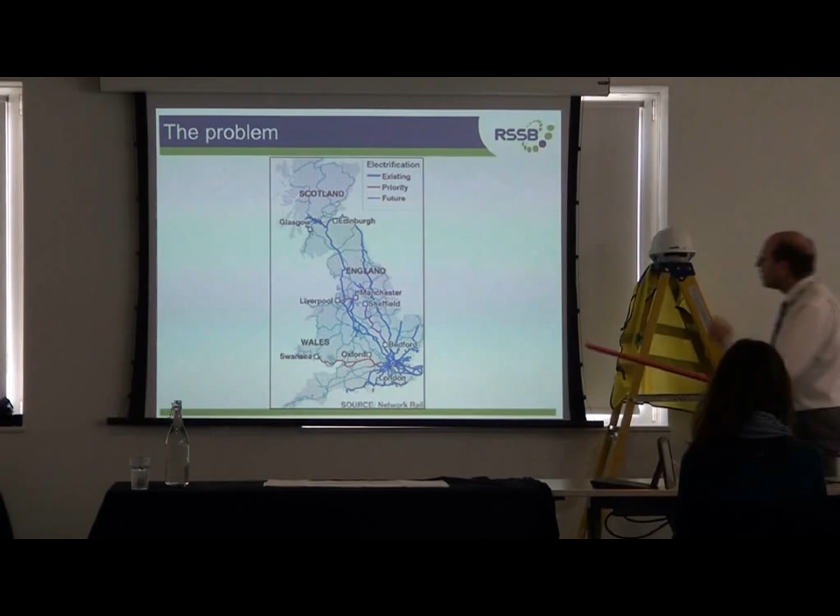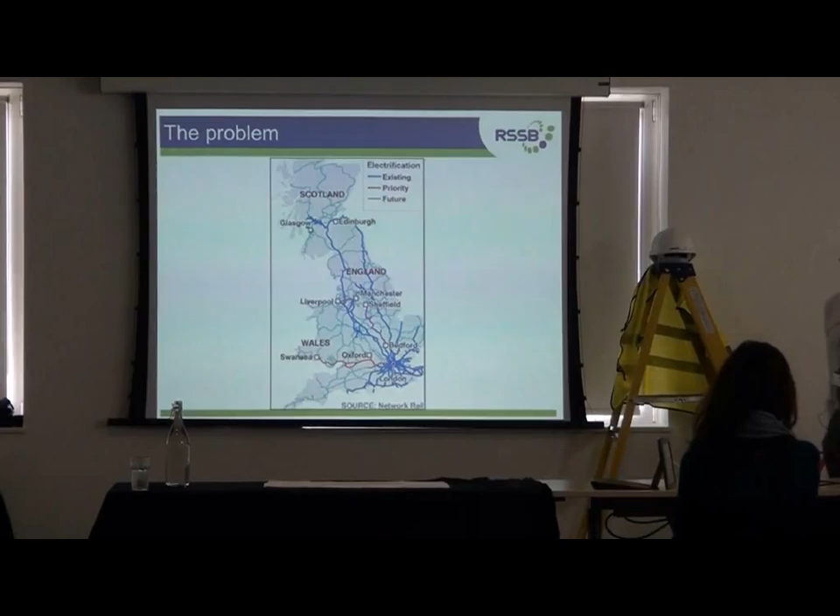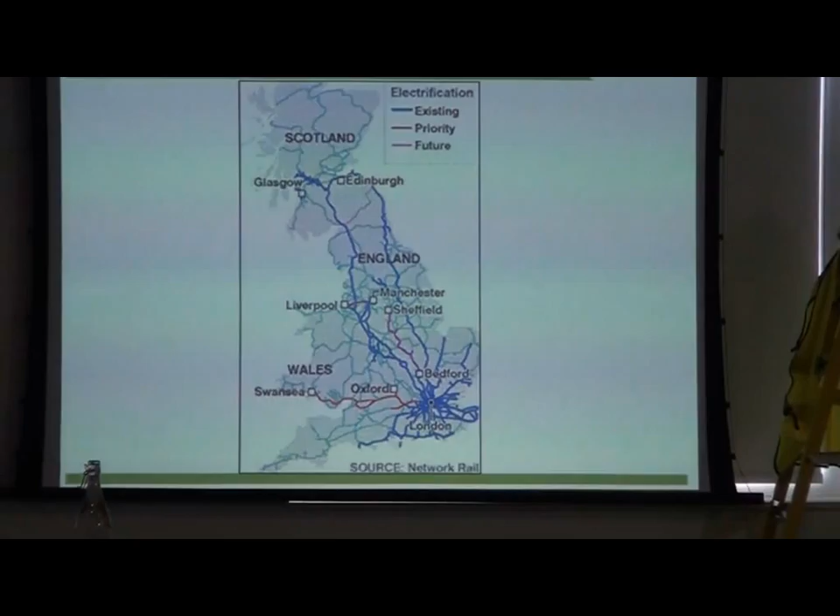This map is a map of Great Britain, and we've got the current electrified lines marked up in blue, and a few proposed lines as well. But that represents only about 40% of the network. Even with the plans announced, there'll still only be around 50%. So there are vast parts of the nation with no electrification whatsoever.

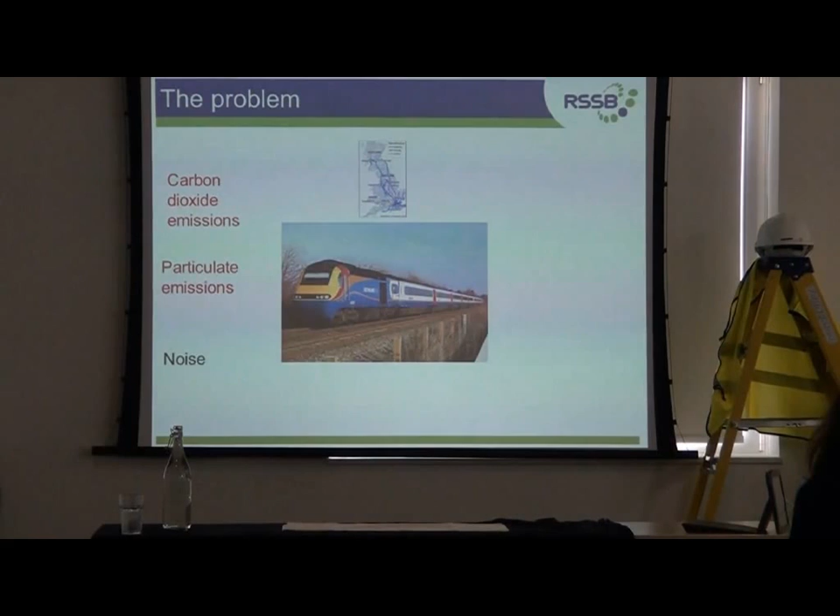The current alternative is diesel, and there are a number of problems associated with diesels. Carbon dioxide emissions contribute to global warming and climate change. Particulate emissions lead to lung cancer, and there's noise pollution. There are only finite fuel reserves, and there's security of supply - if you look at the areas where oil is available, they often correlate with sources of conflict.

So a long-term alternative to diesel is needed.

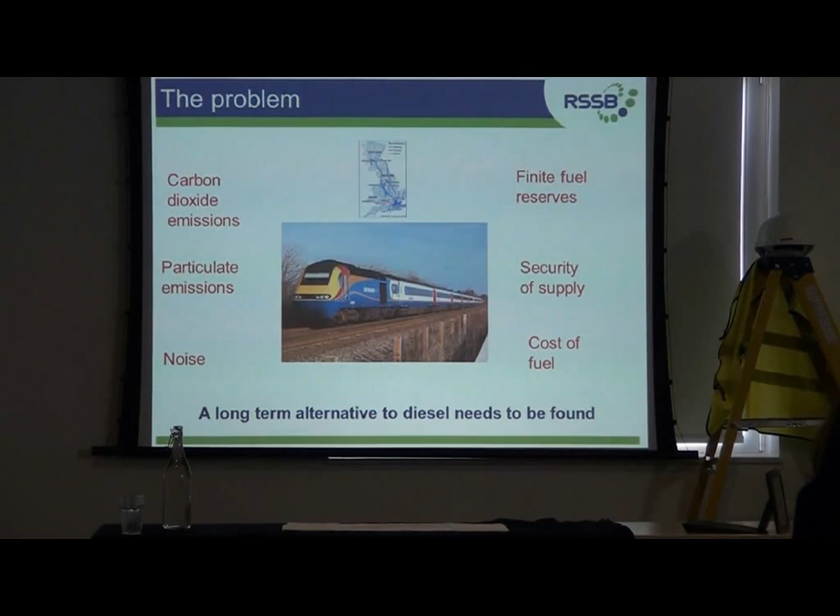One solution is, of course, further electrification, but that isn't the solution I'm looking at today. I'm looking at a solution which is the magic of hydrogen. We should look at the possibilities this element can provide as an alternative to diesel. In case you don't know me, my name's Jeff Allen, and I would like to spend the next 40 minutes entertaining you, and I might just enlighten you as well with the magic of hydrogen.

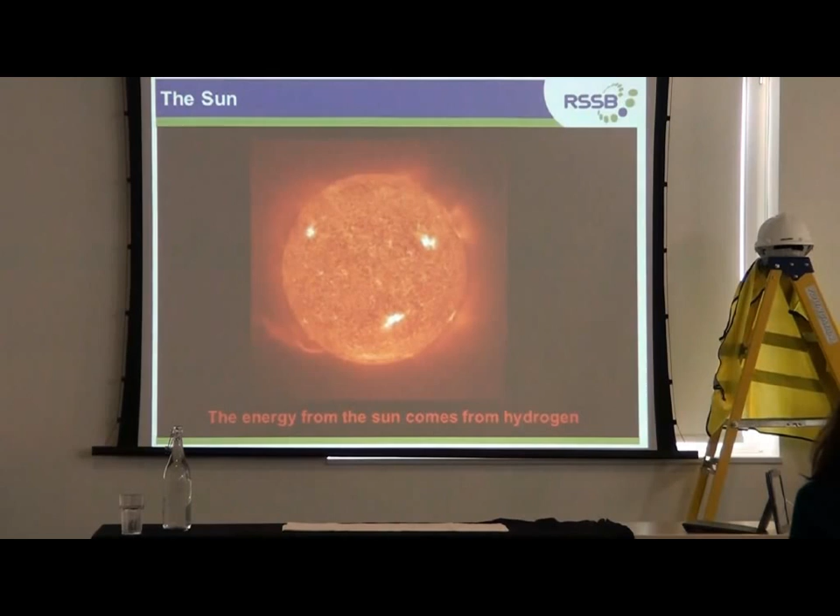If we go a bit closer - the Sun, our nearest star. Again, the most abundant element in our own star is hydrogen, which generates the heat and light which we enjoy, particularly on a summer's day. So the key message there is that the energy from the sun comes from hydrogen.

Getting even closer - planet Earth, our own planet. Now, planet Earth is a notable exception. The most abundant element on Earth is not hydrogen. Does anyone know what the most abundant element on Earth is? No - I'll tell you, it's oxygen. Fortunately for us. So oxygen is the most abundant element on Earth.

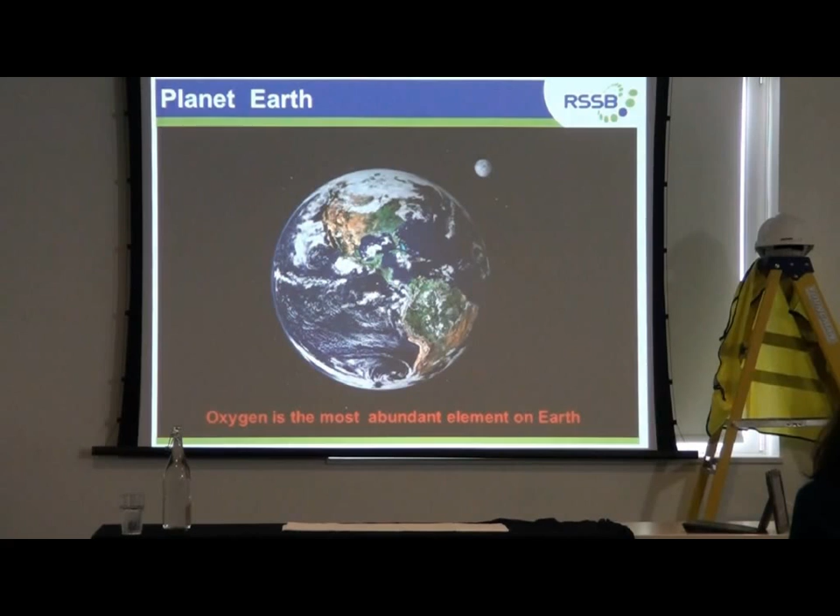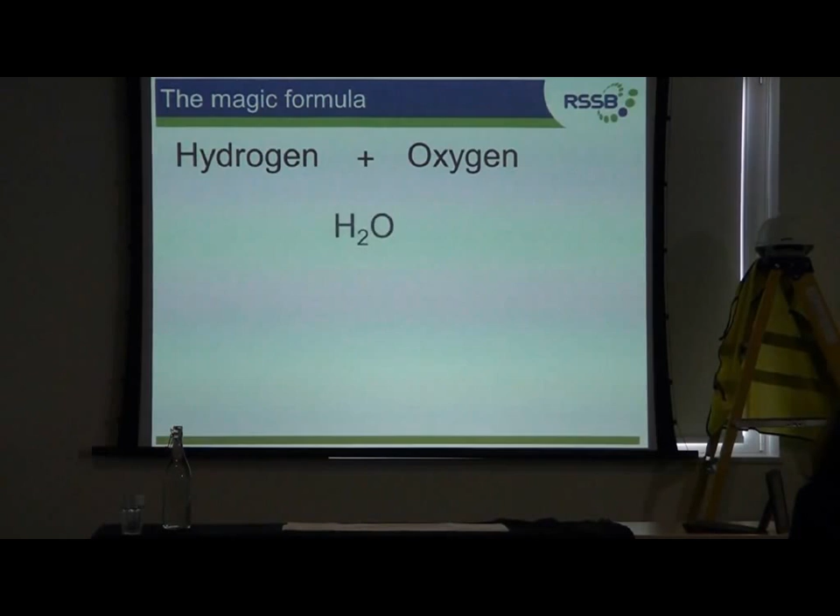Now, what I want to cover next is key to the whole presentation - it's the magic formula. And the magic formula goes something like this: we add hydrogen to oxygen, and it won't come as a surprise to many of you, particularly the chemists here, but what you get is H2O, which is water. What we often don't appreciate is we also get energy. So by combining hydrogen with oxygen, we can produce energy.

Now, when I came in this morning, I thought it was a good idea to have a look in the Financial Times, so I bought a copy. Mustn't spill anymore. I don't know if anybody else has looked in the Financial Times today, but there's quite an interesting article talking about climate change, about an Arctic voyage opening up to allow ships through the Arctic - obviously a shortcut. It's quite an interesting article, but I wasn't sure really how watertight the argument was, so I thought I'd test it out. Yeah, seems pretty watertight to me. Still watertight. Oh well, there's your magic. Thank you.

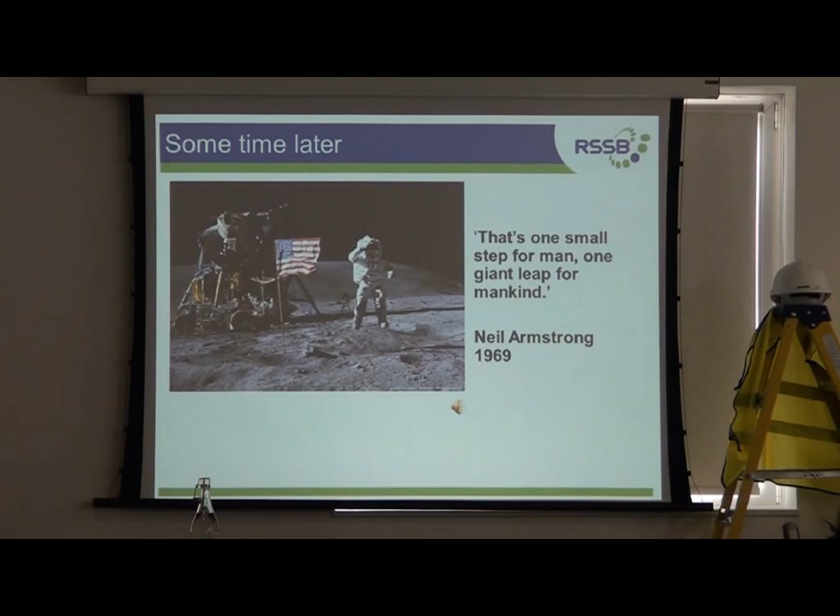Now some of you will be aware that there were a number of engineering challenges to achieving that. And this was one of the first ones.

Now I've primed Jeff for this, wherever he is, at the back there. Jeff, I'm not going to ask you for the model number. We're going to say this is a 1906A, and you're going to tell everybody who made that. It was made by a company called ICL, who was the British computer industry at the time. White hot heat technology - these days it probably has about as much power as your average watch, I think. But in those days it was absolutely the leading edge of technology, and as you can see, it's quite large, occupying more or less a house.

This was actually the single computer that we had at the University of Birmingham when I started as an undergraduate. And one of the first jobs the mission had to achieve was reducing that in size, which they did. This is the navigation computer, which is not much bigger than a modern desktop.

But that wasn't actually the most significant problem that they had to deal with. The much bigger problem was working out how to power the craft up in space for 3 days and support 3 astronauts. So what they did was they looked at the technology available.

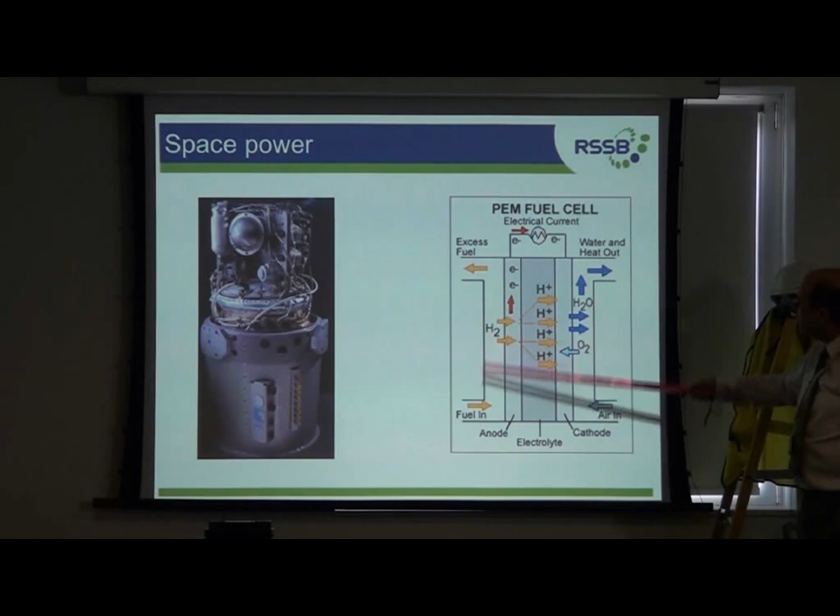It's a fairly straightforward device. It's got a couple of electrodes, and basically you pump hydrogen in at one side, oxygen in at the other, and you've got your power and your water coming out. These devices have been used ever since the Apollo mission, all the way through the shuttles. The Russians use it, the Chinese use it, and so forth, for all their missions.

Now what I've got is an experimental one here, a little one. This is the fuel cell here - basically looks like that. I'm going to pass this around, you can have a look. Please don't dismantle it, I've got to use it a little bit later on in the presentation.

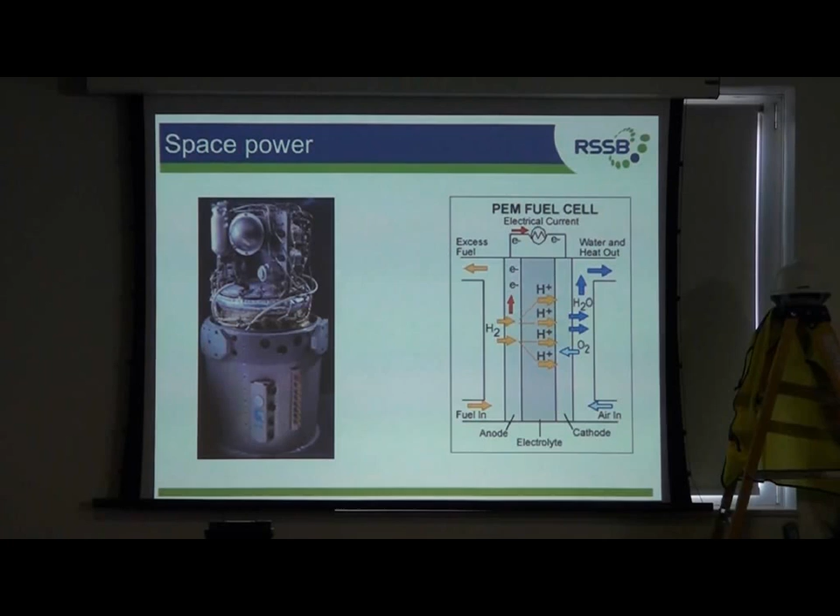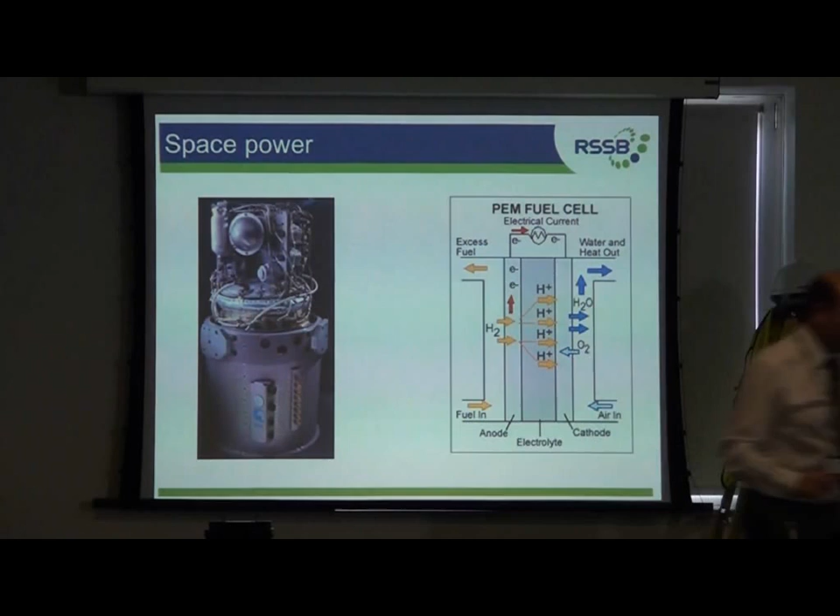Now, a couple of years ago, I would have struggled to demonstrate one of these devices - commercially available ones anyway. But within the last 2 years, these units have been coming out. So this is a mini pack, a hydrogen fuel cell. That's the fuel cell there. And I've got 10 litres of hydrogen here.

I'm going to plug in. Now you'll see the little red light flashing. We've just got to wait a short while until that red light turns to blue, so you can keep an eye on that. Won't be long, I hope. There we go - right, that's all ready now.

So if I put this on, there we go, a hydrogen-powered torch. Now, I've just thought of a brilliant idea - just happen to have one of these handy.

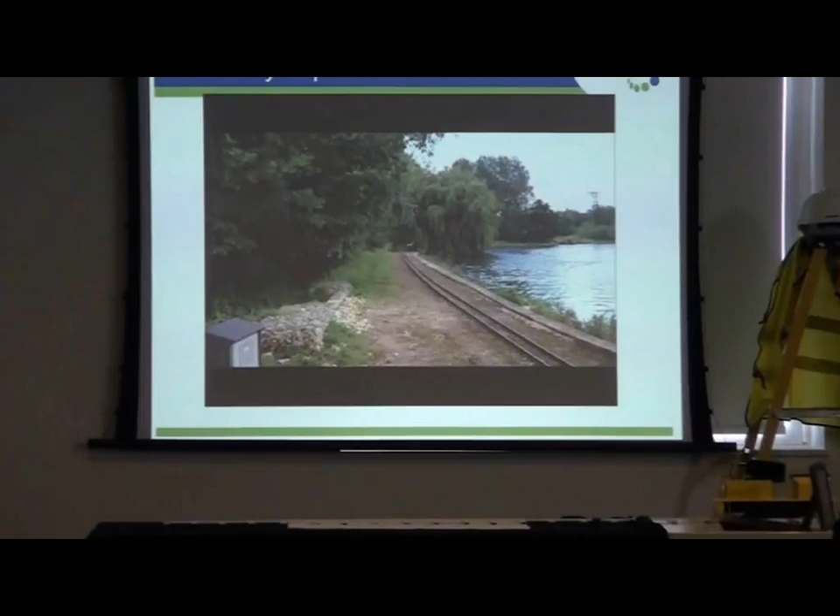Well, this is the University of Birmingham. This was filmed earlier this year, and it is the UK's first hydrogen-powered locomotive. It even makes the right sounds.

Now that's 4 tons of load on that it's hauling. That's about 100 times more powerful than this device, but still not very powerful. It would hardly even power a kettle. You'd wait an awfully long time for your tea with that.

So, what about the real world? What about going beyond the experimental stage?

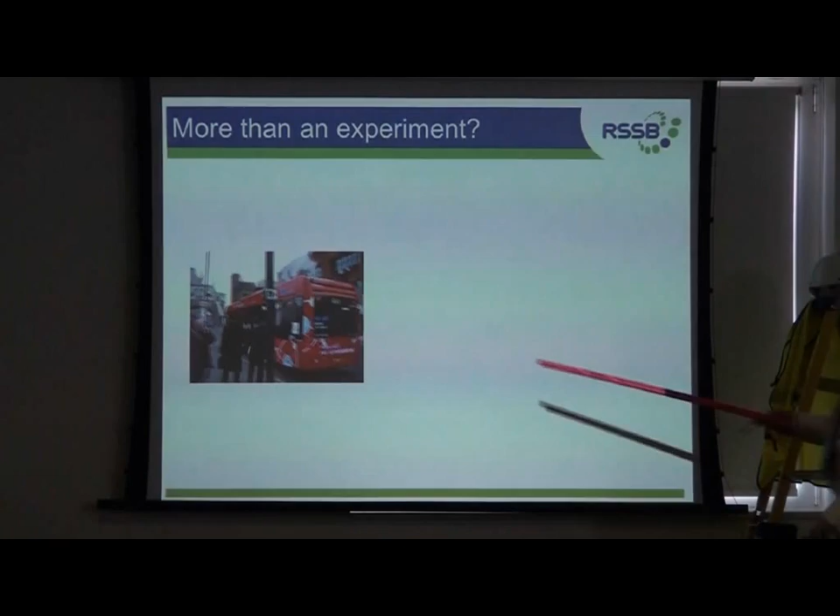Well, this was a video that I recorded in 2007, and it was a trial of a hydrogen-powered bus running on the RV1 route, which runs along the Strand, across Waterloo Bridge, across the river, and then, as you can see here, goes back up Tower Bridge.

That trial has now ceased, and we now have the second generation hydrogen buses. So this second generation set of buses are running on the RV1 route now.

And in addition, below that you can see the taxis, or a taxi, which is also hydrogen powered, and that taxi was developed in time for the Olympics, and is actually powered by a hydrogen fuel cell that's made in the Midlands, in Loughborough, by a company called Intelligent Energy.

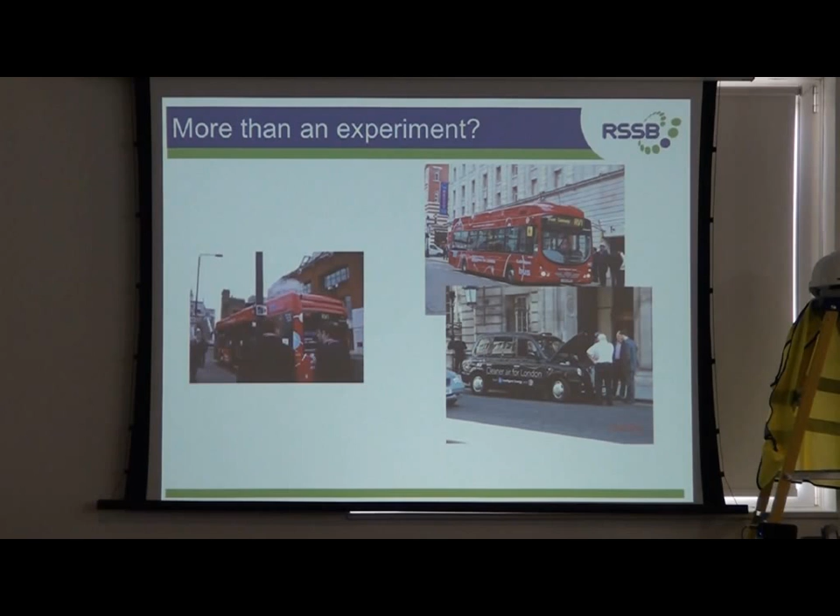So really you can see that hydrogen is being used for transport today.

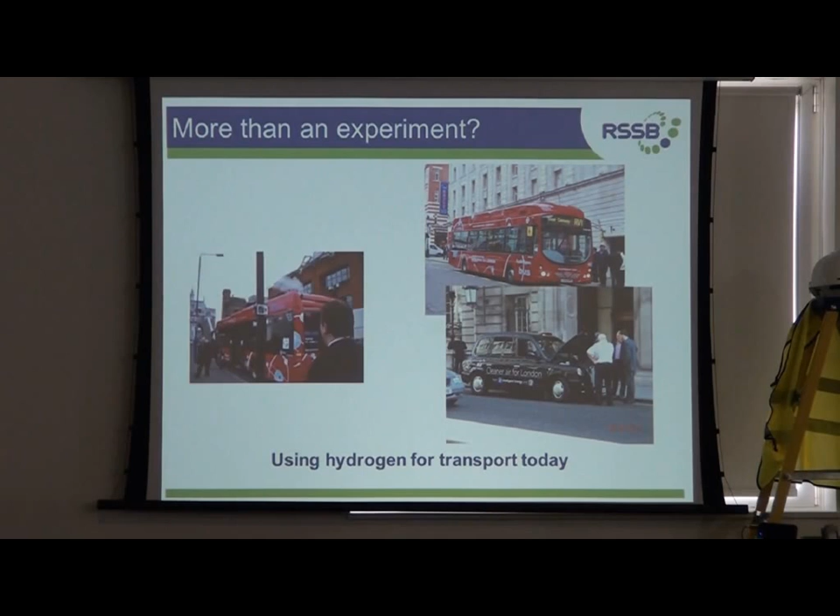Now, a lot of railway people will explain that it's all very well running buses and all this sort of thing, but the environment's very harsh on a railway and it doesn't always work on a railway.

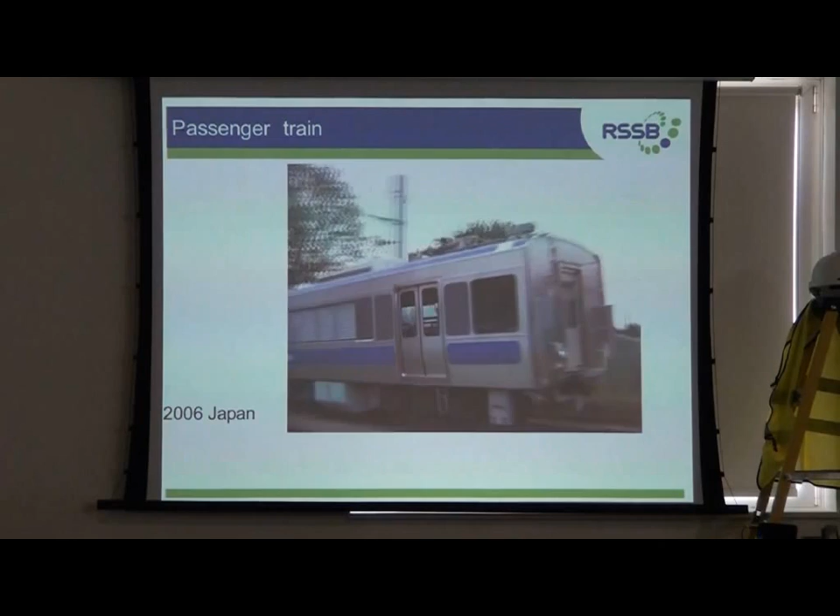So, if we now have a look at this. This is 2006 in Japan, and this is the experimental one that was run by Japanese Railways as an experiment.

And if you don't think that's big enough, what about this one?

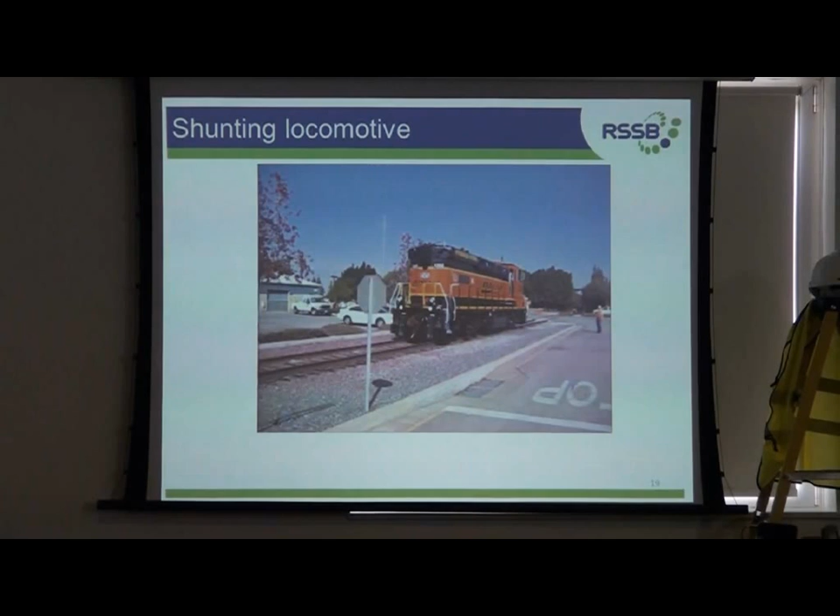Now, the great thing about hydrogen locomotives is they're very quiet, which is why they have to have an awfully loud bell on them. This one is a very powerful locomotive.

It's a shunting locomotive. It's a 1 megawatt locomotive, and not only was that proved in terms of trials of shunting wagons around, it was also used as a power supply to supply a complete army base. So there's lighting, heating, cooking, air conditioning, and the US Army were particularly interested in this development and sponsored some of that work.

Okay, so as you can see, it's a little bit more than just a fanciful idea. It's something that seems to work. And what I want to do now in the remaining time is progress on to look at two elements of hydrogen. One is manufacture of hydrogen and production of hydrogen, and the second thing is storage.

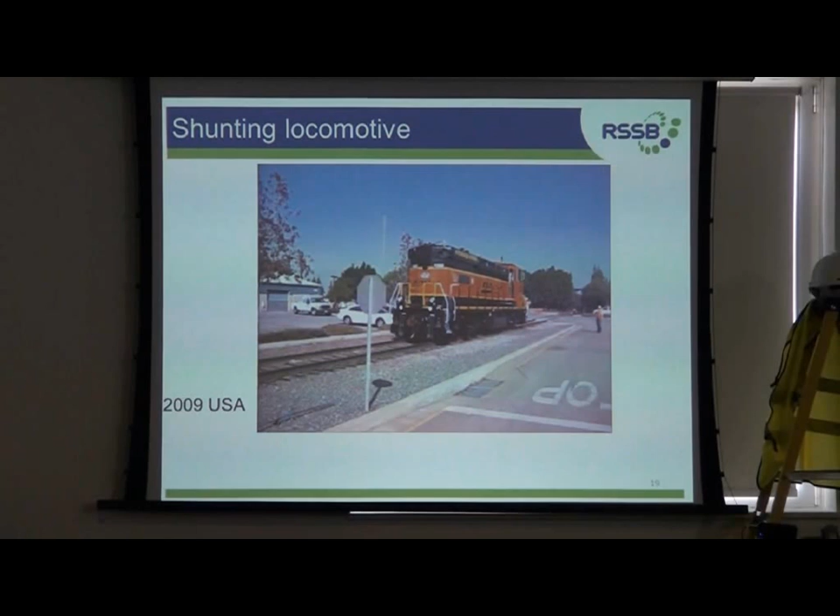So let's have a look at manufacture.

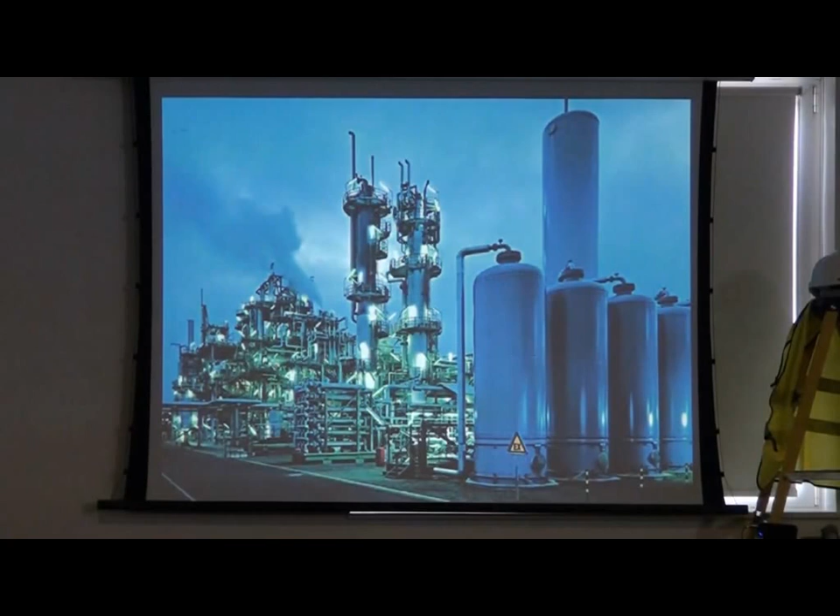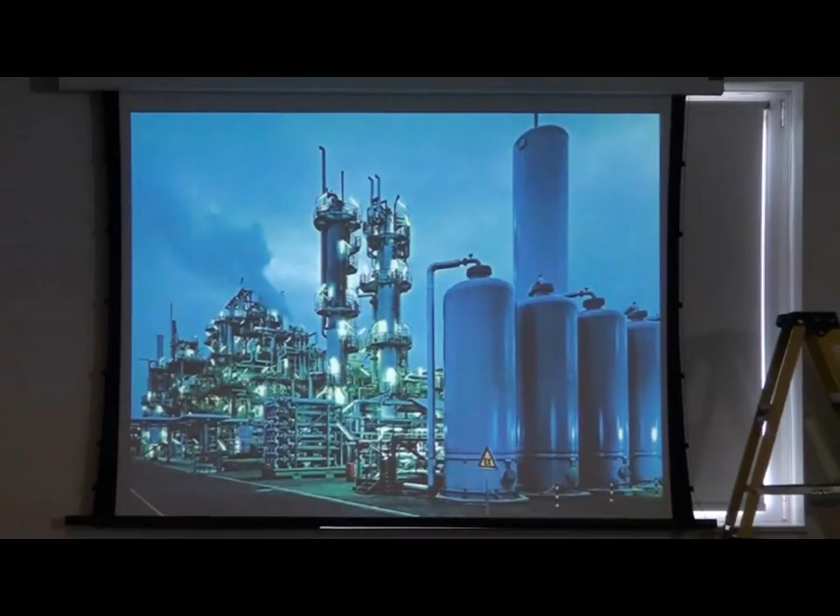Well, what I need is a chemical plant like this, and obviously I can't bring that into the presentation. So you just have to pretend.

No. There are other ways of doing it, so we'll have a go at one of those. Who left this line there?

Now, all you need is some water, a bit of plastic container, a few LEDs, a couple of AA batteries, got some of those over here, a syringe.

Yeah, so hurry up now.

Okay, so we'll put the... can you all see that? Whoops. Bit too much water in there.

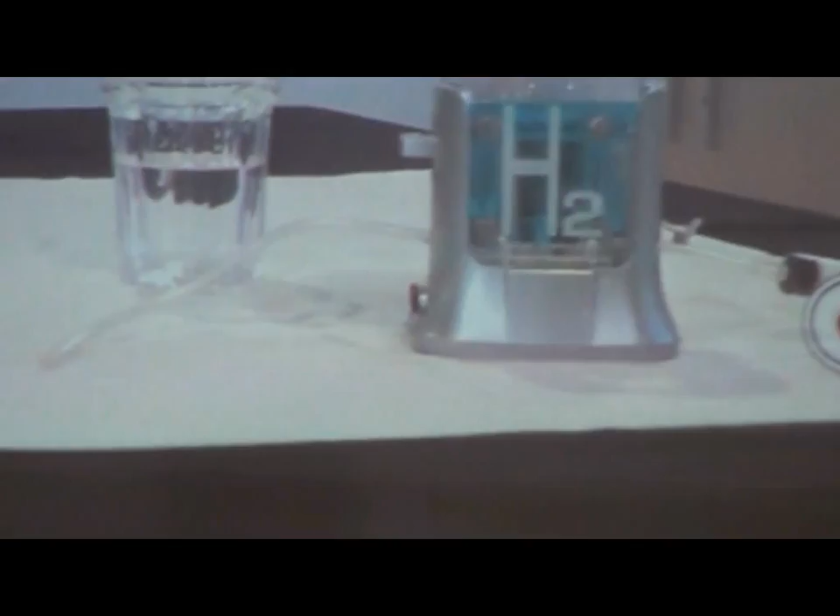Has somebody got the... thank you.

Now, I just need one of these. I just happen to have down there.

Right, there's absolutely nothing there at the moment. So what I'm going to do is just connect this supply of hydrogen.

Well, there it goes. There we are. So we're getting that hydrogen produced. It's going into the fuel cell, and the fuel cell is now generating a small voltage.

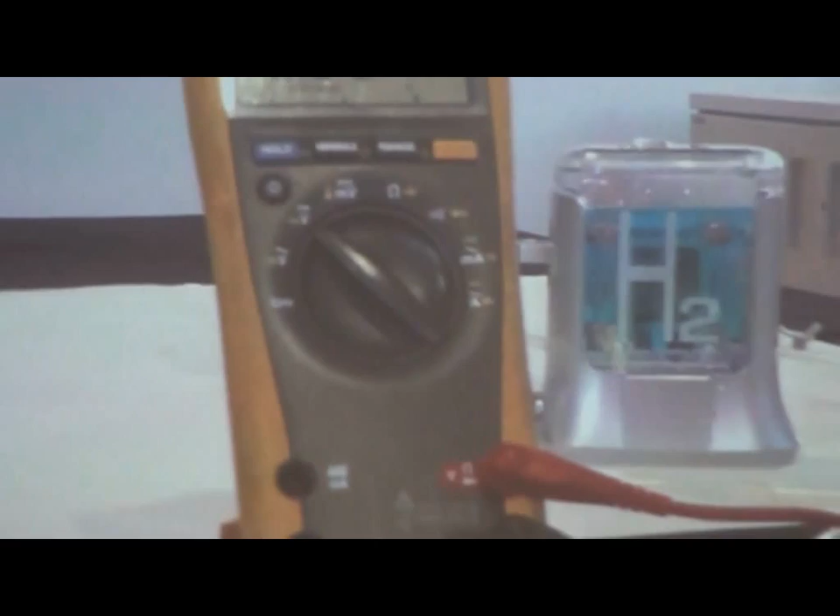We'll give it a little bit longer, get some time to get going. Actually, I could make it a lot easier by pulling this out.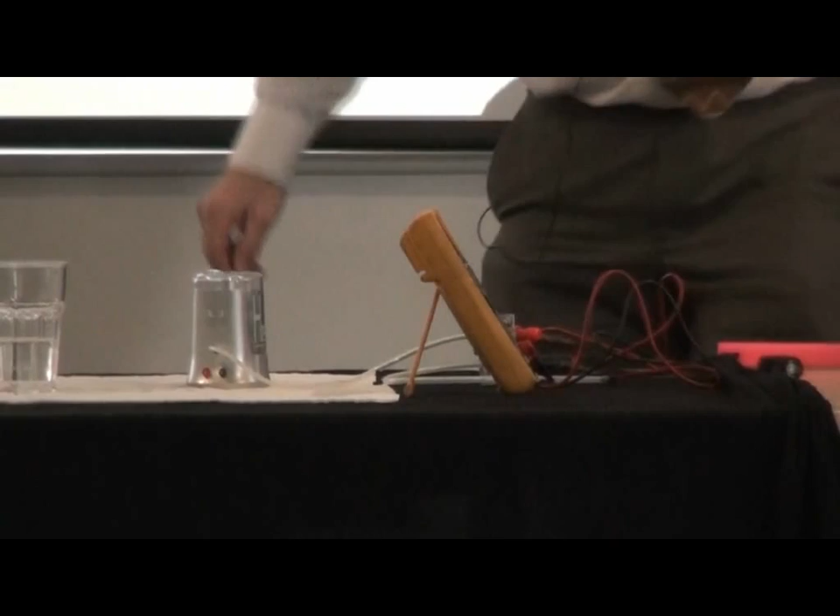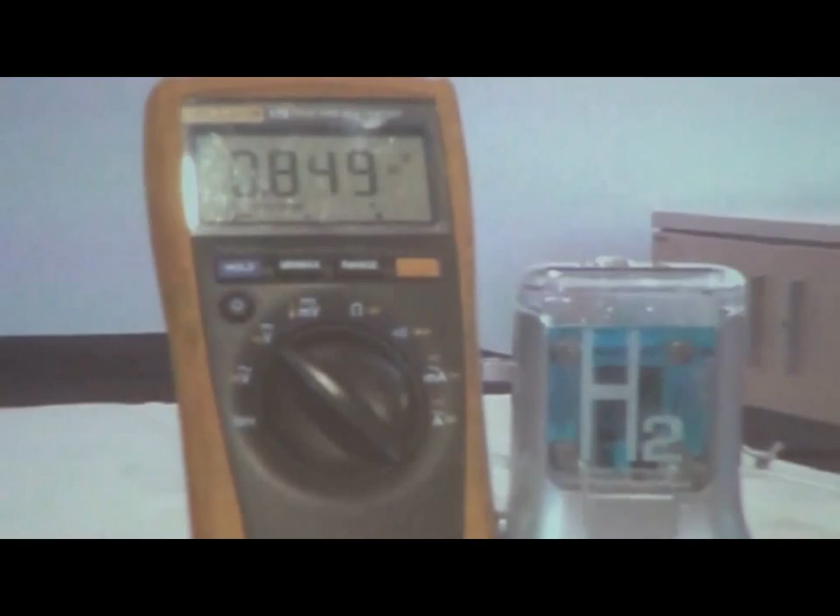There we are, nearly a volt. And if you string these all together, you can get the sort of thing to power a locomotive if you make it big enough. So, that's a means of producing hydrogen from water using electricity and then feeding it into that fuel cell to make the fuel cell work.

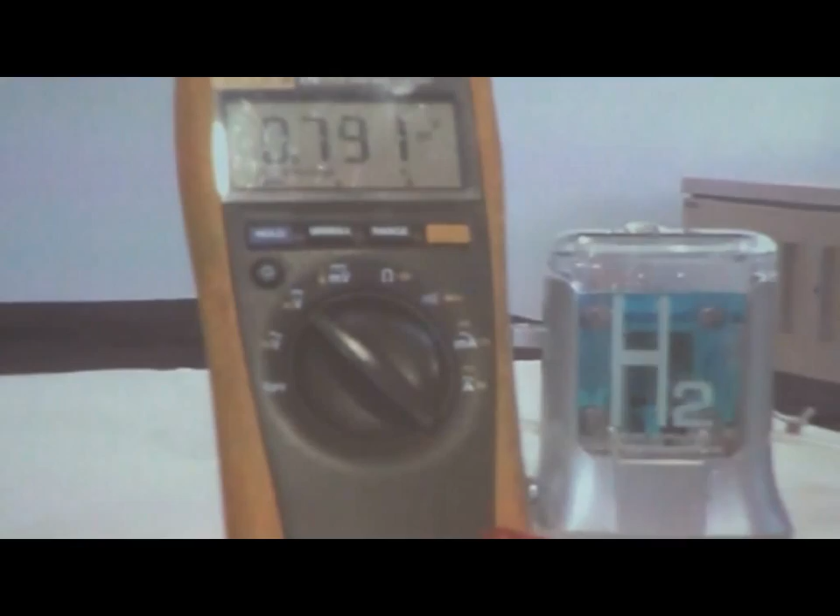Can I advise anyone who's thinking of presenting to the whole of RSSB and doing live demonstrations? Probably not a good idea.

Well, there are a large number of ways of producing hydrogen. The way it's often used these days is from natural gas, but there are more sustainable ways of doing it, although even from natural gas you can get some advantages. This was a slide I produced 5 years ago when I last presented on this subject, and this part hasn't changed very much.

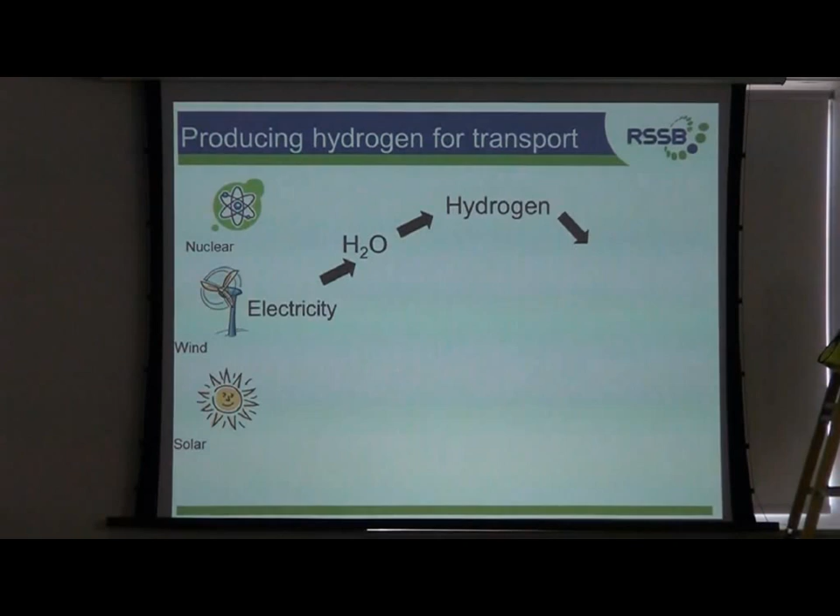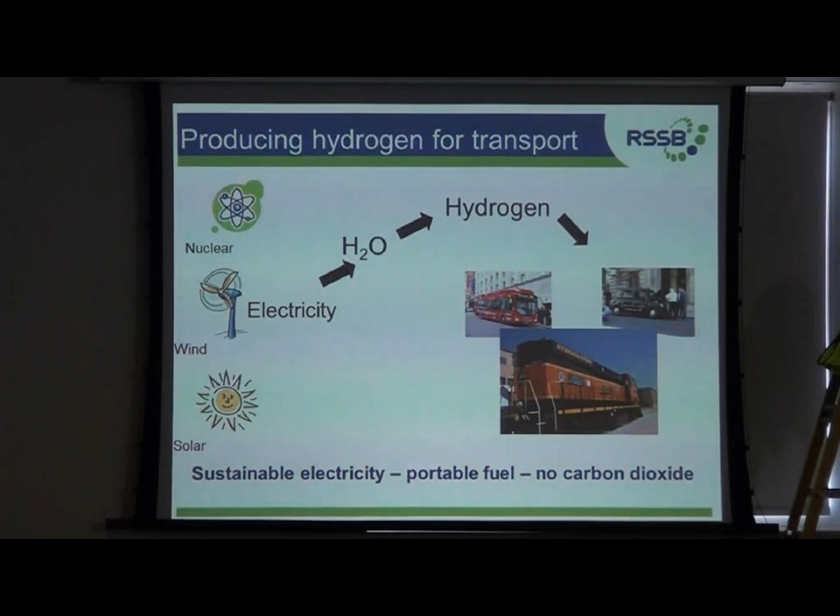Electricity applied to water gives hydrogen, as we've seen, and then you can apply it to any of these more modern forms of transport. I had 3 examples in the last presentation, and each has been replaced with a more up-to-date version, so things are progressing here. Sustainable electricity is able to produce a portable fuel, and if you use sustainable electricity, you get no carbon dioxide, no noise, no particulates, etc.

Now, what I want to move on to next is looking at how we store hydrogen, because having produced it, you can't always use it directly as we have here. One of the most popular ways in which hydrogen is stored is by compressing the gas.

There's quite a bit of nonsense talked about storage of hydrogen using compressed gas. One of the myths that goes around is that you put a lot of energy into compressing the gas. Well, to give you some idea, it's about 5%. So the energy that's in that gas, if you want to compress it to a reasonable extent to go into something like that, you use an additional 5%.

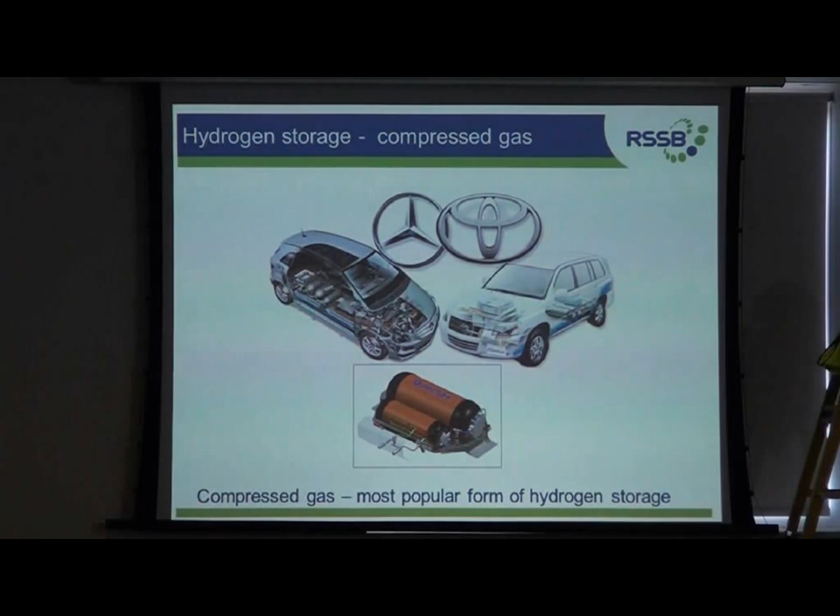There is a way of getting a longer range that I want to talk about next. So this is the most popular form of hydrogen storage. But what I want to talk about next is liquid hydrogen. But I want to give a little bit of background on that.

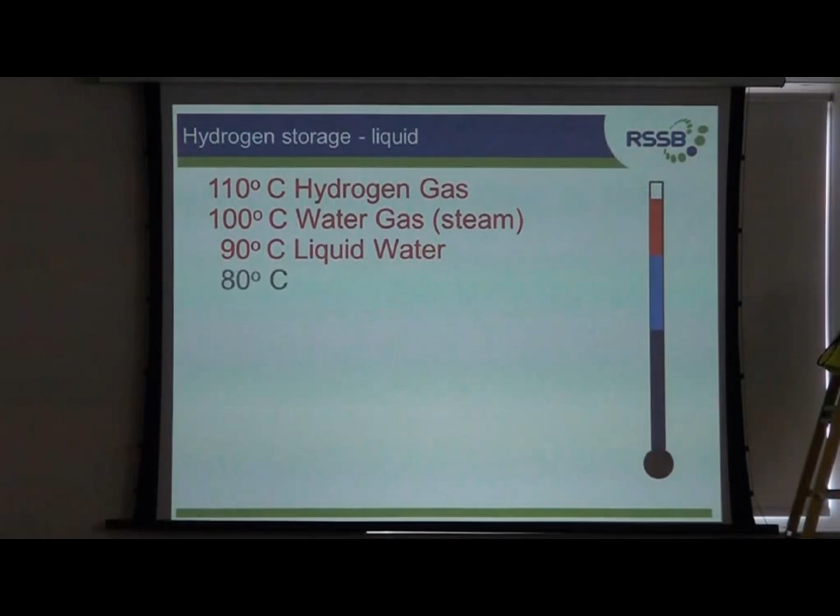Because if we think about temperature and start at 110 degrees centigrade, so this is 10 degrees higher than the temperature that water turns into steam, it's in gas form - we have hydrogen gas at 110 degrees. If we go down 10 degrees, we've got water in the form of gas, i.e. steam. If we go down a further 10 degrees, we've got liquid water. And if we go even further down, to 0 degrees, so we're now at ice temperature, it's still a gas even below that, at minus 10 degrees.

So let's keep going. At minus 80, it is still a gas. Just to give you some idea, minus 89 degrees is the coldest recorded temperature in Antarctica. Right, we'll go down a lot quicker now and a lot further. At minus 240, we still have hydrogen as a gas.

We actually have to get down to minus 253 degrees centigrade to get to liquid hydrogen. And to give you some idea, the very coldest temperature you can get to is minus 273 - it's not physically possible to get below approximately minus 273. So that's how close liquid hydrogen temperature is to absolute zero. So to put it in simplistic terms, liquid hydrogen is very, very, very cold.

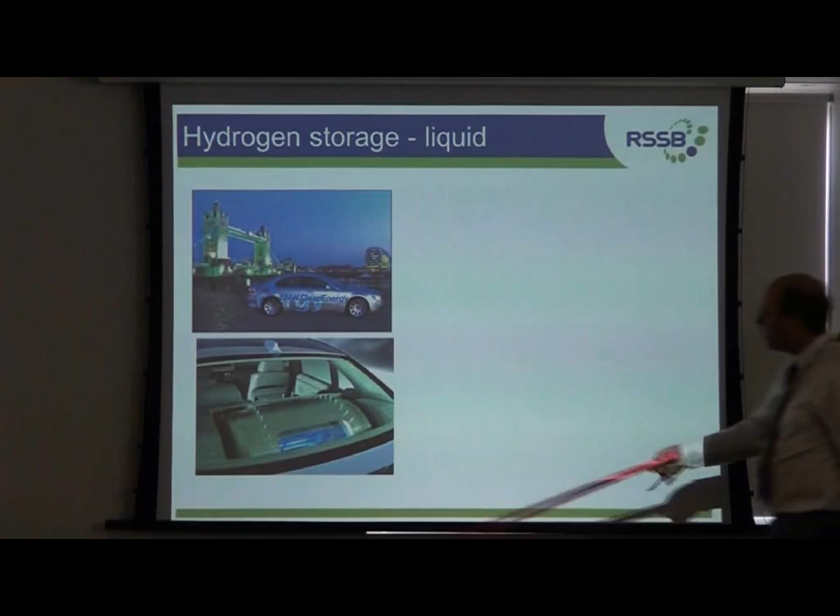This is the tank in the back, partly in the boot and partly on the rear shelf. You can see what it's like in the boot. And this is like a super thermos flask for liquid hydrogen.

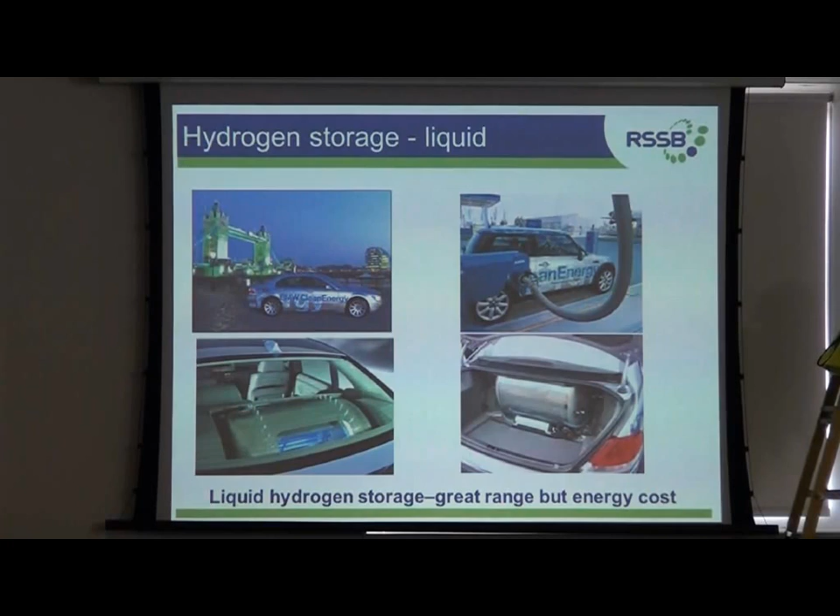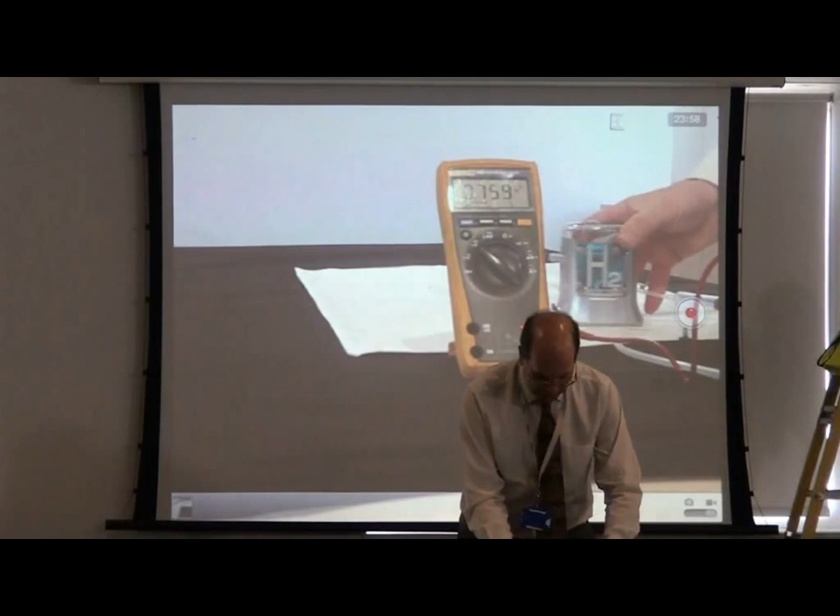So what I want to move on to is another technique which is used, and that technique is of particular importance to us. Now, I will have difficulty doing much in the way of demonstration of this, but I'd like to give you an analogy. So we've got a sponge here, and you could obviously use that to soak up all the water I've spilled during the presentation. And then to release it, we can squeeze it and all the water comes out.

And there's a particular type of compound, metal hydride, which I've got in here, which is capable of absorbing the hydrogen if the hydrogen is presented to it. And then it can be released with a very modest amount of heat. In fact, so modest that the hydrogen fuel cell I showed you earlier - which I seem to have lost, oh, it's over here - using this cartridge. And I'll pass a few of these round.

These cartridges are filled with metal hydride. The hydrogen is presented to them, which means they're not pressurized at all. In fact, you can carry these on an aeroplane. I'll pass these around so you can have a look.

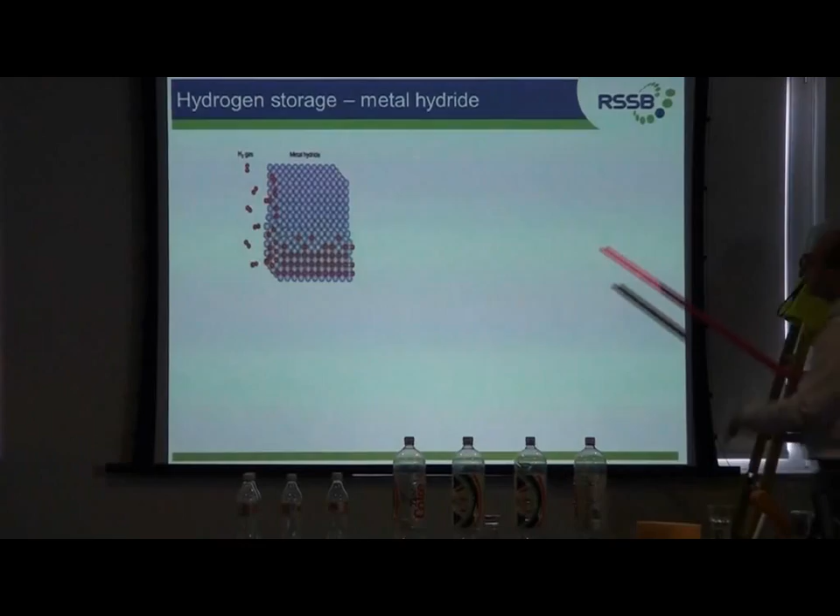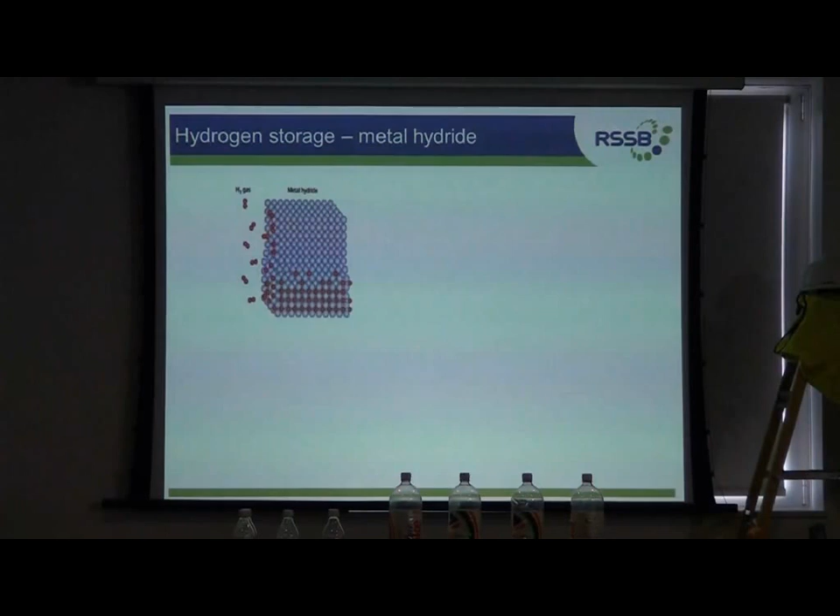This particular technology is quite interesting. It works on the principle of the molecular structure of the metal hydride, with hydrogen molecules or atoms hiding inside the gaps between the molecules. This actually manages to store hydrogen at a better rate, or in a smaller space, than current forms of compression. So no compression is involved, and no energy is needed to compress the gas.

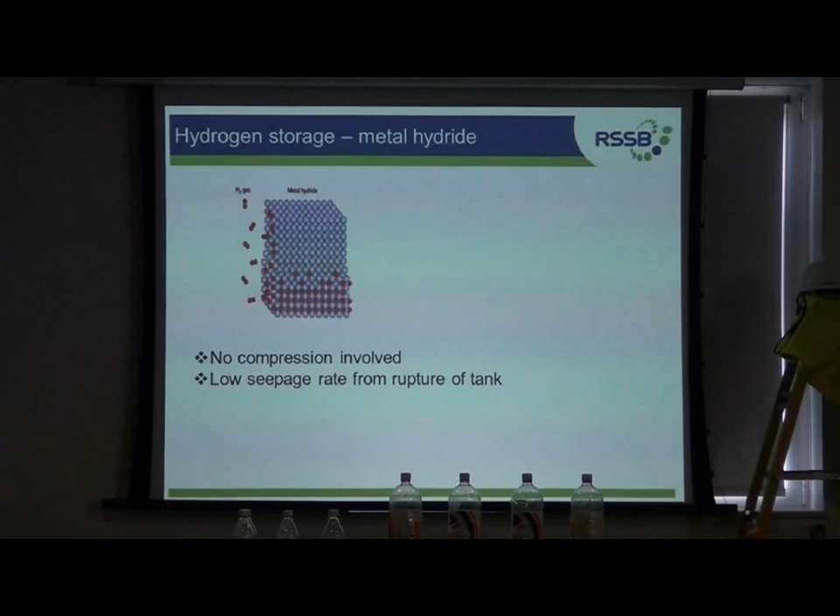There's a very low seepage rate from the rupture of the tank. If you were to put a hole in it, because it's not pressurised, it would come out at a very slow rate. In fact, this form of storage has been used in all the mining locomotives where safety is paramount.

It's potentially more compact storage than even liquid storage. It's pretty good at the moment, but it is open to nanotechnology development to make it even better. As I said, no compressing energy or liquefying energy is needed.

The real problem you may notice as this thing goes around is that it's quite heavy. It's got metal dust in it, in tubes, so it's too heavy for road use. Car and bus manufacturers have found they can manage quite adequately with compressed gas, which is a cheap way of doing it and perfectly adequate. But rail is an application where this could easily be a very good way of storing hydrogen.

So metal hydride storage provides excellent range because it can store so much hydrogen, and it has a number of safety properties which are particularly attractive.

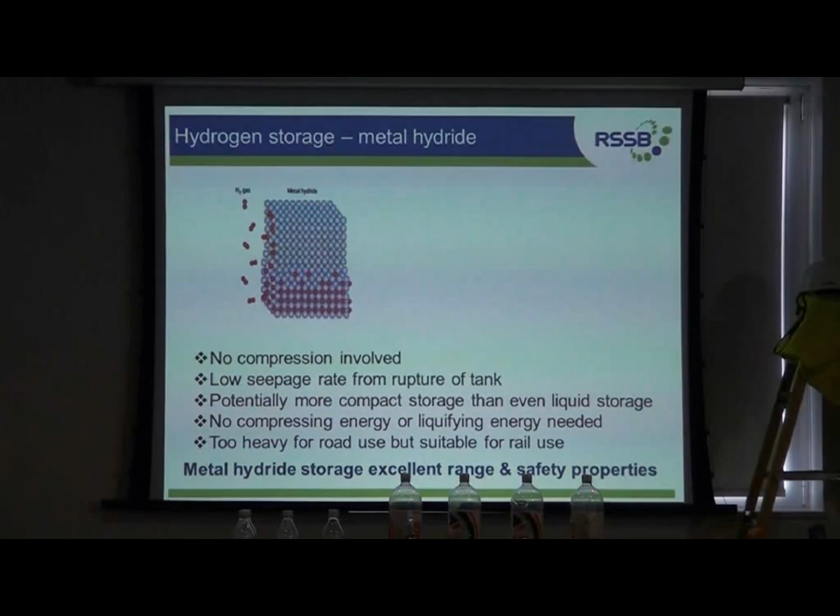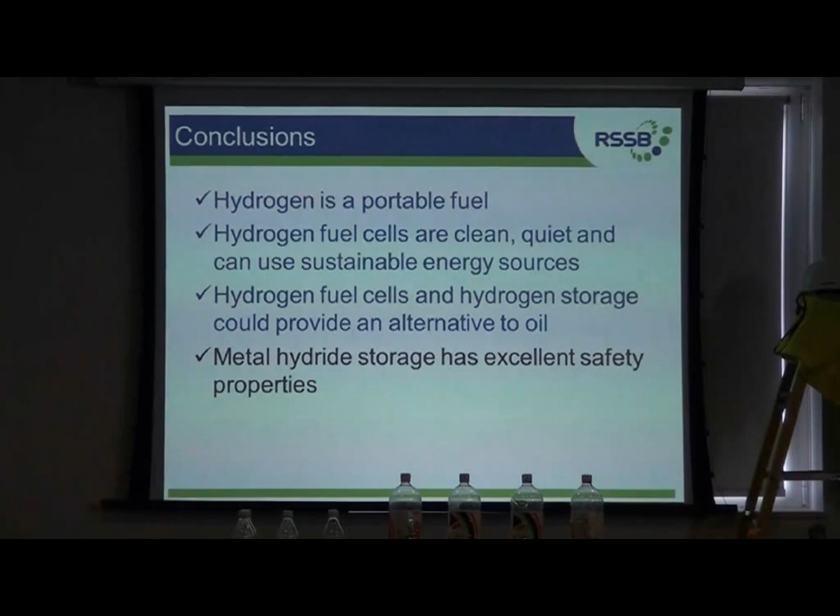So in conclusion, here are the bullet points, in case any of you have been anxious because you like bullet points. Hydrogen is a portable fuel. Hydrogen fuel cells are clean, quiet, and can use sustainable energy sources. This could provide an alternative to oil. I've also introduced you to metal hydride storage, which has excellent safety properties and has already been quite extensively used in rail, and could well be something worth pursuing even further, perhaps on the main line.

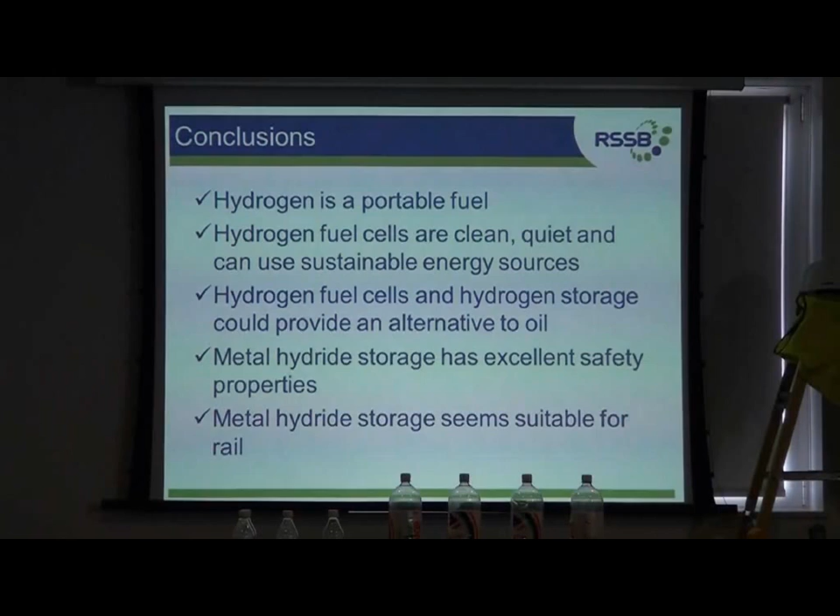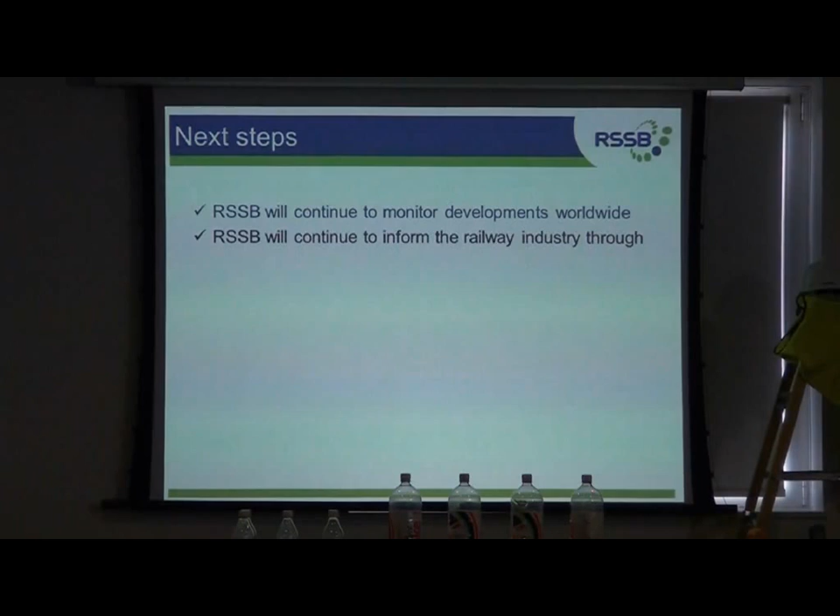So what about next steps? Well, RSSB is continuing to monitor developments worldwide, and David Knights' team are particularly active in doing that. We inform the railway industry through a group you might not have heard much about, the Future Energy Technology Group. But what can you do?

Well, what I would advise you to do is look up in the sky when you get an opportunity, away from artificial light, and just ponder the amount of hydrogen that's out there. The other thing you might like to do is explore the RV1 bus route. Not all the buses are hydrogen, so you might have to wait for one to come along and miss a normal one. You can't miss them, though - they've got hydrogen written all over them. I'll work with Diana, and we'll send out a little map of the RV1 route so you can work out where the most convenient place is to catch it.

I'd like to acknowledge some of our friends out there who provide us with information on what's going on in the rail world and other worlds in respect of hydrogen: Vehicle Projects Inc., with whom we have a very close relationship; Air Products here in GB; Japanese Railway, the Railway Technical Research Institute; and the University of Birmingham.